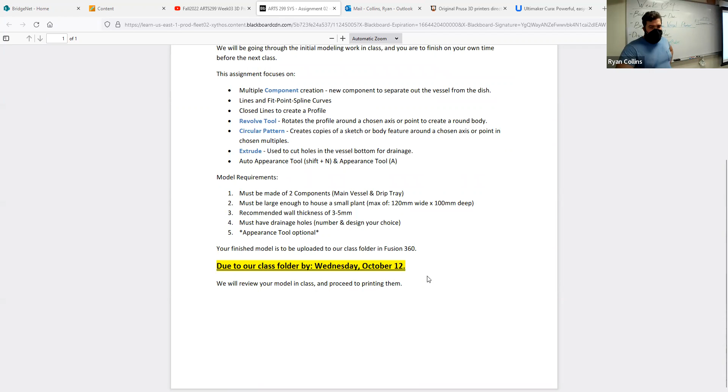All right. So with this project, and this will be due sooner than later, it's like 2 weeks, October 12th. In this project, you're to design a round vessel that's large enough for a small potted plant. And I know that's a relative term, but I do have dimensions down here.

Using the Revolve tool, and we're going to discuss what that is. Also, it must include some sort of a drainage dish. So it'll be two separate components consisting of their own bodies and sketches. I'm going to talk about what that really means. Obviously, we'll be going through this in class, and you'll finish outside.

So first is multiple component creation. So far, we've been working on the default single component that Fusion gives us. I'm going to show you how to create multiple components, multiple separate components. This will also consist of your basic line work and sketches, and we'll use closed lines to create a profile, just like you did to extrude.

Only, like I said, in this case, we're going to use the Revolve tool. This creates and rotates that profile around a chosen axis. Sometimes it's referred to as a lathe tool, kind of like if you have ever actually used a lathe, doesn't matter metal or wood. It's a round cutting thing. This is creating something round, basically.

We'll also be using the pattern tools, and in this case, a circular pattern tool, both to create holes and other features. This creates copies of a single sketch element or body feature, object, doesn't matter. The pattern tool is really helpful within Fusion, around a chosen axis or point of your choosing. Basically, this can take what you've just done with the Revolve tool and add features to that same Revolve tool on its surface. Pretty handy.

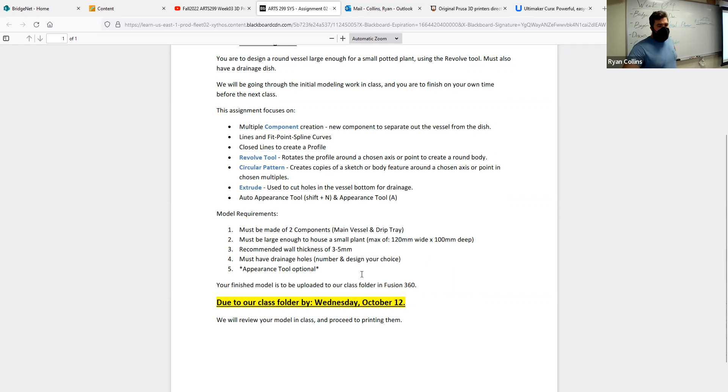Deep meaning the actual depth of the project, across, that sort. Recommended wall thickness is about 3 to 5 millimeters, that's a good thickness for this material we're using. It must have drainage holes, otherwise you've just made a teacup. The number and design is totally up to you, and the appearance tool is optional. I'll again show you how to do that. All right, so let's go over just what any of that stuff means.

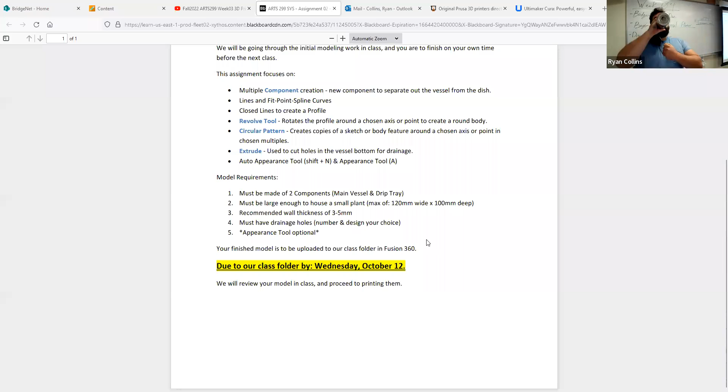All right, so first things first, save your project. Always start with saving your project. I know you kind of jump right in—I do too, I'm sometimes bad about it—but it's always best to start by saving.

Control save or Command save, or just go up to the save icon, and we'll go with the example name Revolve... oh, be better if I can spell.

Revolve Vessel. All righty. So in this case, you can go off of an object if you want, an image. We talked about how to use the insert canvas tool, but not going to use that on this one. Or you can just freeform this—totally up to you, doesn't matter.

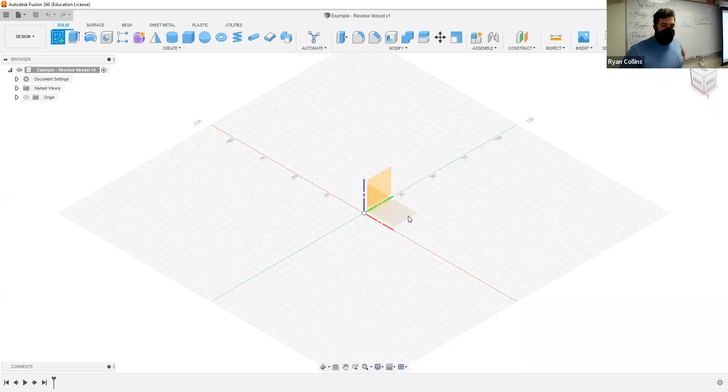In this case, though, we're going to start with a sketch, but instead of working on the XZ plane, we're going to work on the XY plane. Right there. And just to refer to what we're doing here, I'm creating something directly in front of myself, working directly off of the sketch plane.

Now, a few things I like to work with: you need to have it at a general dimension. It doesn't have to be that big, it can be smaller, you can make it slightly larger, somewhere around that. But we're working with something about 120 millimeters wide or tall by about 100 deep. Those are relative—you can tweak those dimensions if you like, that's fine. But what I like to do is start with a bounding box.

And all that is literally just making a box that helps me define that. I'm also going to use this as a construction line. So I'm going to start with selecting that construction line box on the toolbox, or you can just press X.

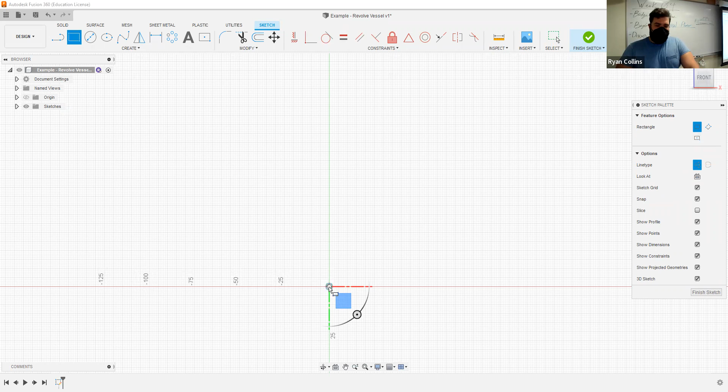So starting at the origin point, I'm going to go up, and I can tab over. All right, I want that one to be 100 millimeters tall. And then for width, since it's 120 wide and I'm only starting on half, let's go with 60. Okay, now I've got a construction line box that gives me a general reference point.

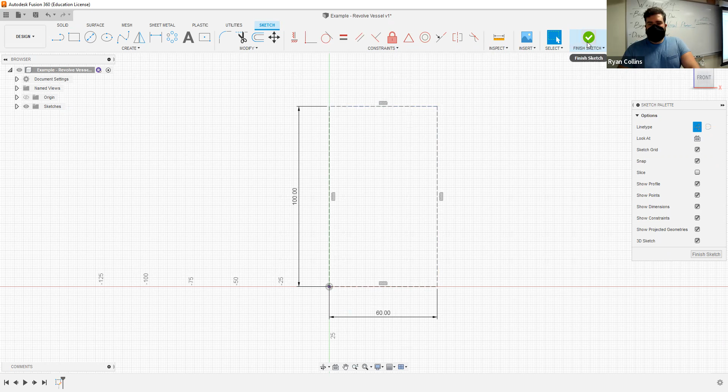Good. Finish sketch, and I can just leave that there. All right, finish sketches—and I'm going to label this as reference.

Okay, now I've started this sketch, but one of the main elements of this project is it must be in two components. The component here, your main set, is the highest set of elements on your hierarchy tree. Now it doesn't mean it's the absolute top, but it means that a component can consist of everything on here. Basically, a component can consist of—and this little icon right here, the little cube, is the component icon—origins, sketches, bodies, any variation of other bodies and elements and tools, joints, all kinds of stuff.

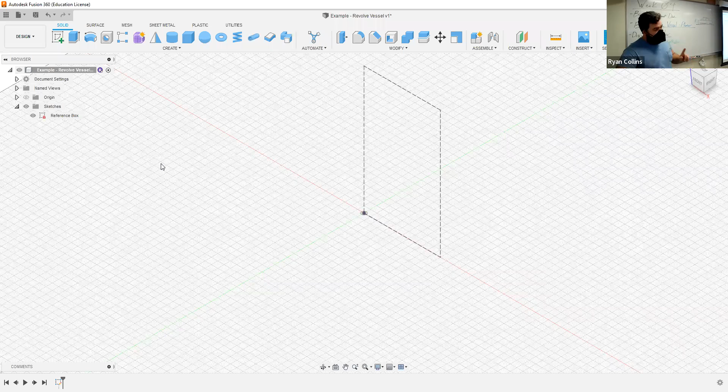But this needs to consist of more than one component, so that means each component is going to have its own sketches and its own bodies. Technically, a component can consist of multiple components—you can nest them within each other. In this case, we want to avoid that; we want to make two surface-level components.

So to start components, go up to the top bar, go all the way over to Assemble, and it's your default icon up here—the little stack of cubes. You can also use the drop-down; you'll see a bunch of options. Top one is New Component—that's what I want. Mouse over that and you can see it creates a new internal or external component.

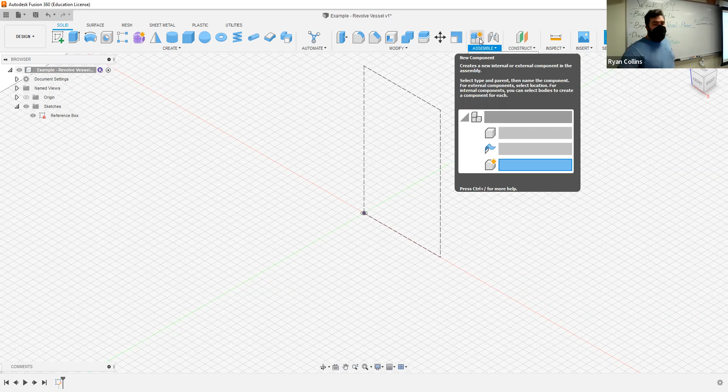That means it's either within its own component, or it's its own component or within another—you can nest them. You can also...

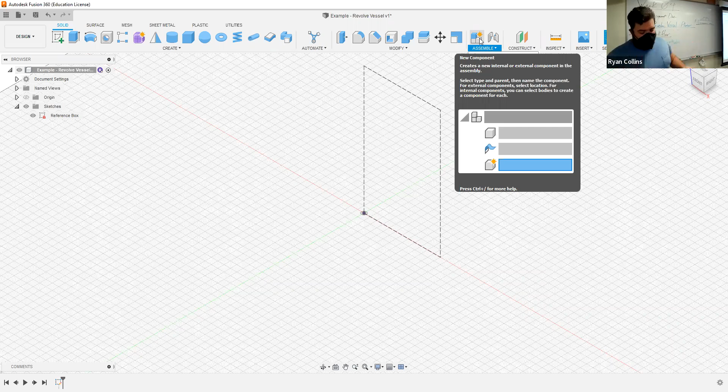extract components or bodies, objects from a current project or component, and create an entire new component utilizing that. I know that's a very vague concept, but I just wanted you to know that if you forget to start by creating a second component or multiple components, you can still course-correct that.

But I'm going to start with making components. So select that button, you'll have your toolbox pop up, and you can pre-label these. All right, so I'll start with vessel—and right now there's no parent bodies or anything like that, so it's just standard, same with type standard. We're not working with sheet metal, we're just working with a standard component.

Select OK. Now you see that a new component box, this little cube, has appeared down here. Also at the top of our hierarchy tree, that single cube icon has turned into a little stack of little cubes—that's showing there are multiple components within this one component project. All right, the other thing that's happened is, it's hard to see, but my sketch line has kind of ghosted out.

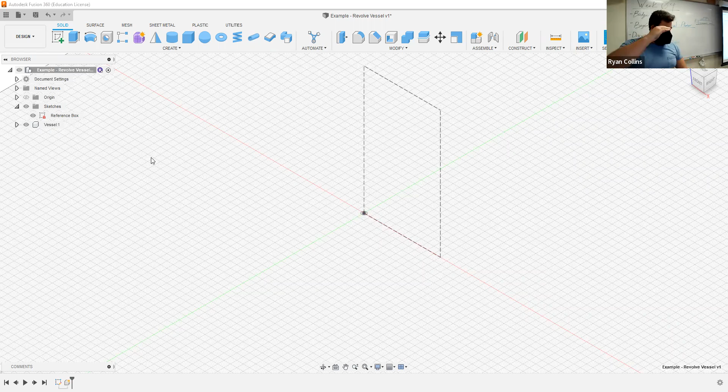That's because I have this component currently active. If I go back to the very top, at the opposite side from the little eyeball icon, you'll see a little circle appear on the right side. Select that. That activates the entire project.

So what I want to do is go back up to the top, select that. I'm going to start another one, a new component. For this one, we're going to label it not stray, tray. Select OK. Now it has created another single component.

You can see these two components are their own single component. There's no stack on them. The stack is on the top here. So, all right, now I have my two components made.

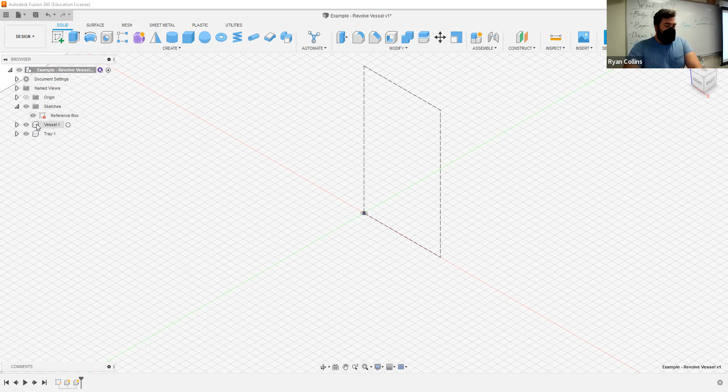I can go back to the very top and reactivate everything, but in order to keep things isolated and a little more organized, you want to actually activate the component you're currently working on. This is a little trick to the workflow we've been using: start by creating your components, just like starting by saving your project. It just helps save you a little bit of headache down the line. That's all.

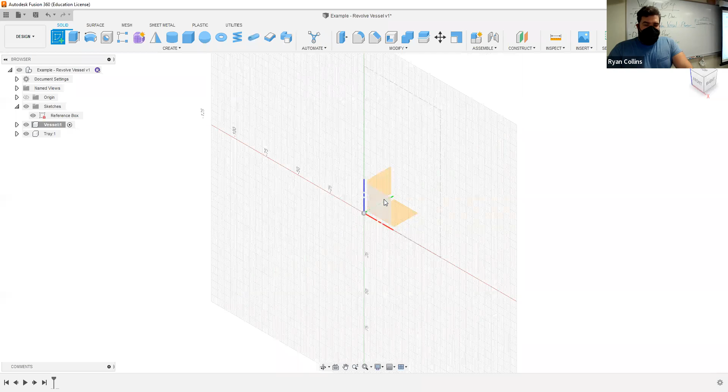So, all right, I've got my vessel active. Now I can start a new sketch on this. Select the same XZ axis, working there, but I have my bounding box on another component, and it's still visible because it's still active and visible. Select the hide icon and it goes away. I'm going to leave that there because I want that as a reference.

Now for this, like I said, you can start with a reference image if you like, or you can just kind of freeform it. Doesn't really matter, because this is a very organic assignment in that there's no real direct requirements. We will discuss this as it pertains to 3D printing and what will be easier to work with or present problems, but we'll come to that.

Main thing is you're making a vessel. You're making a taller-than-it-is-wide vessel, although not necessarily, because some planting pots are wider than they are tall, so go along with that. But I do have my reference box here that tells me how wide and how tall I can make it. You can make it smaller, that's fine, but that's about how big we want to max out at.

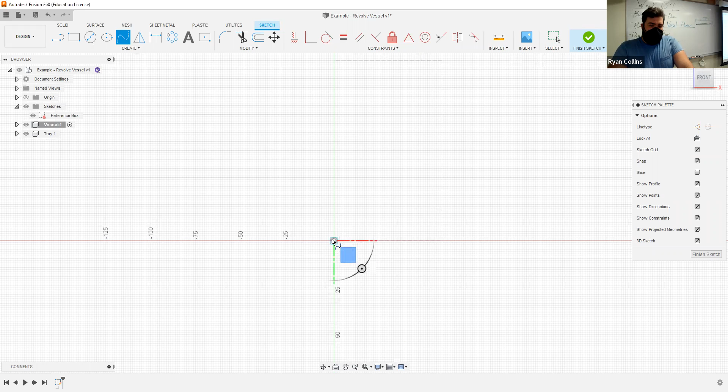From there, honestly, I'm just going to use the fit point spline. So I'm going to start at the flat origin plane, select right in the center, and I'll start working upward. You can make this kind of like a wine glass, or you can make it kind of kick back.

Just remember that if this is for planting a plant in, you do not want to have it shrink at the top, because ultimately as the roots would grow, it would turn into a root ball in there and you'd have to smash the pot to get it out. So I wouldn't go with much of a curve inward. If anything, I would have it flare outward.

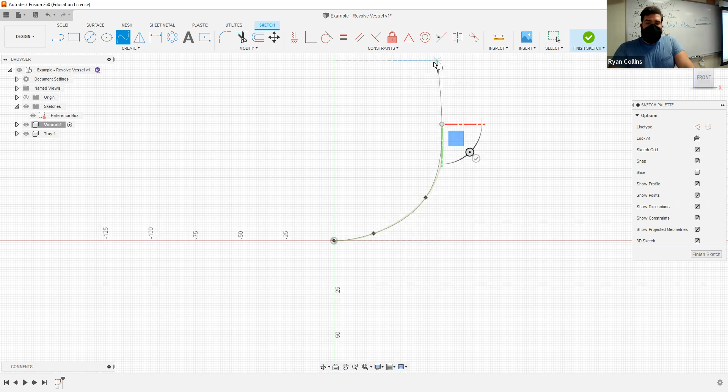With that, I can just start creating a line. There we are. Remember, you can change this around. You can change around any points on a fit point spline. They are interlinked. You can also change around with the handlebars.

You can just really warp the hell out of this thing if you want, or just Control Z back. But if you had a point that made contact or snapped to that box, it is now going to be linked to that box. I can move it up and down, but it doesn't want to let me move it left or right. Same thing up here: this one I can move left and right, but I cannot move it up and down.

What happens if I get to the side? Doesn't matter, I can move it outside of that box. That's fine, but it will not let me move off of there. In order to change that, you have to right click on that point, go down and select delete coincident. It's a constraint that is built in.

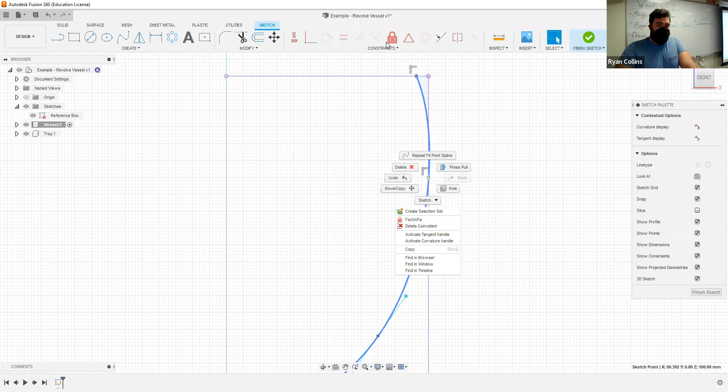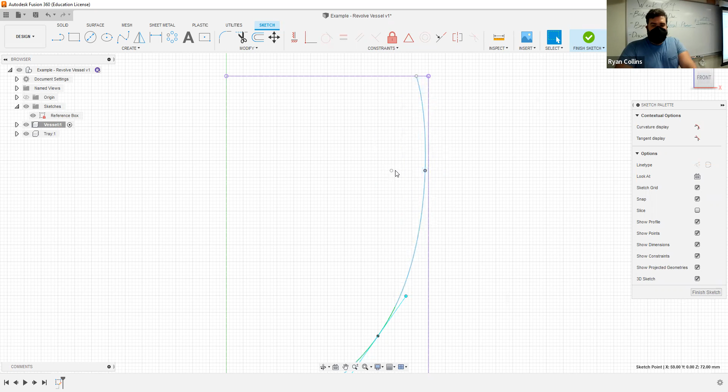Delete that. Now... I didn't do it. Delete coincident, dang it. There we go. Now I can floop it around—technical term, floop. I don't know why I created that point up there. Let's delete that.

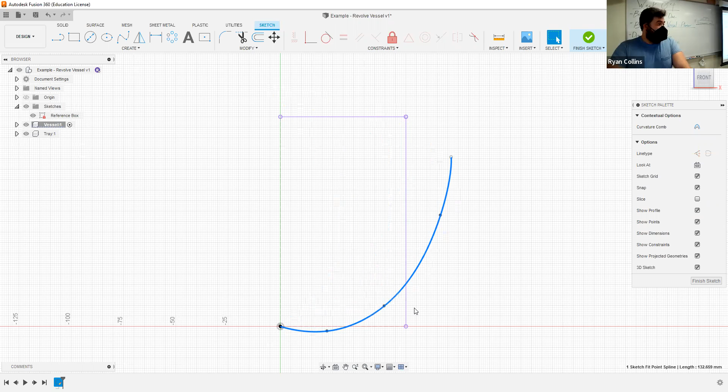So I can still play around with this. I can drag this around. Now that it's unlocked, I can rotate the whole thing based off that single point. There's some really cool built-in features that unfortunately Fusion doesn't necessarily tell you that they do, but this is definitely a mess-around-and-find-out situation. It's the scientific method.

So let's drag some points around. There we go, super duper.

Now, to create a closed profile, remember you need two sides, top and bottom. It needs to be completely enclosed. You can't just use a single line. You can do two things: you can create another fit point spline and try to match that up, or if you don't want it to match entirely, that's fine too. Or the more efficient way, use the offset tool.

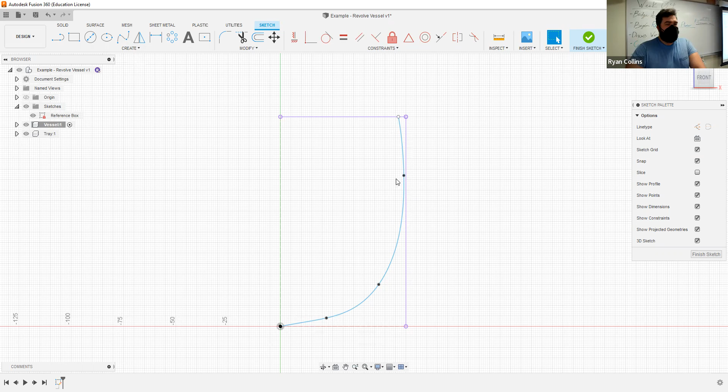Very handy tool. Select a sketch, and this will define a new line. It's not an exact mirror, it's an offset of that line, depending on how far away you make this. In the project, it says let's make sure that's 3 to 5 millimeters thick. So sure, let's make it 3.

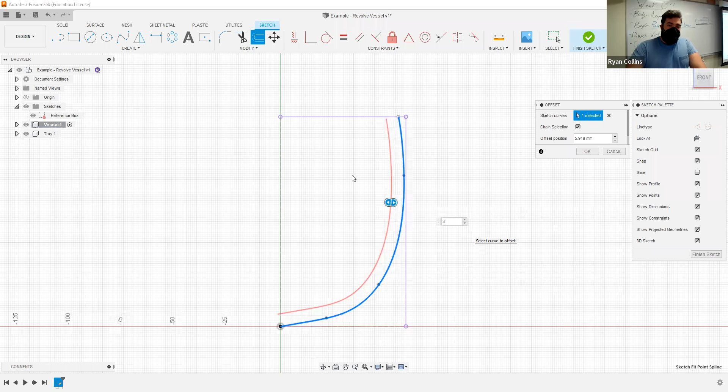It moves over 3 millimeters. Now you see down here, it has gone beyond that line, and at the top it's below. That's because it's operating off of the average direction of a line. If this were an enclosed shape already, an enclosed profile, it wouldn't be a problem, but it would shrink it uniformly out from within that, or outside. You can go outside too, doesn't matter.

That's how it works, it's really handy. But we'll select OK there. Now, to create a closed sketch, I need to close this sketch. So I got two options here. What I can do is just draw a line straight up. That'd be fine, so let's do exactly that.

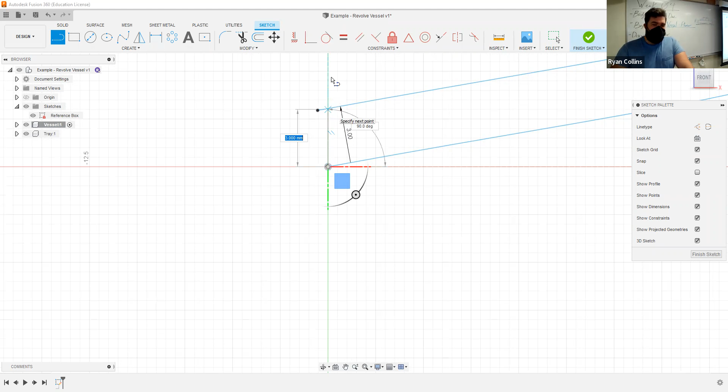Line up. I can have the intersect snap to that bar. Or I could just continue and then just trim off the excess, doesn't matter. Hit escape, but I do have that line there now. Very handy. I don't need that extra dangly bit, so let's go to trim. It assumes that any intersect means that that's a cutting line, so trim off that excess. It's going to give you a little warning because the constraints have changed.

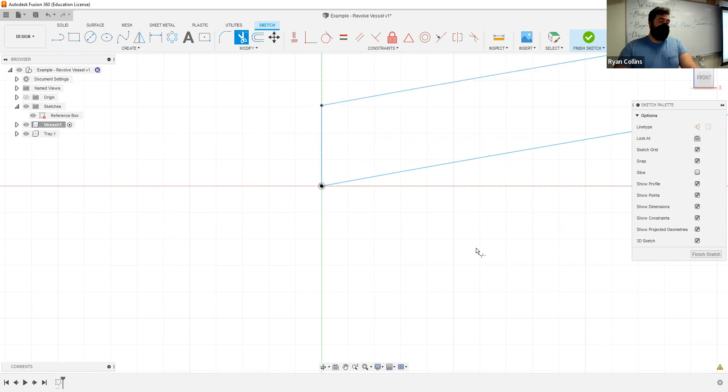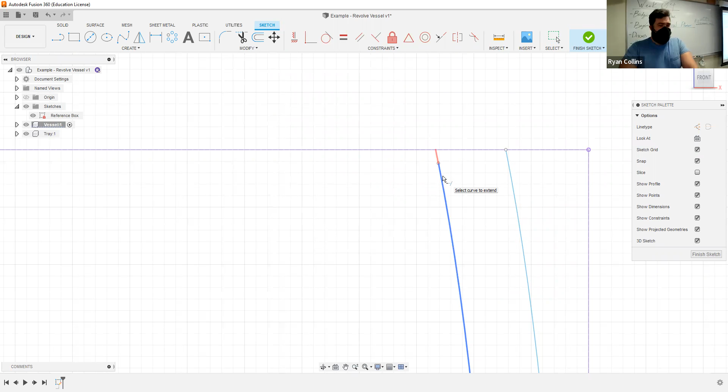It's just telling you you've altered the offset line, which I have. Excellent, all right, now we got the top. So I got a couple options here too. If I want to use this top line as a max line, I can go to modify and extend, and that will extend that line at its current curvature or best summation to the next available cross line. Select that.

That's fine. Now you see that since it has now enclosed, or at least it's using the previous sketch as an assumed other element, now within the bounds of that profile, it has gone blue. That's showing you that it is now a closed profile and can be extruded, or in this case, used as a revolve or anything else.

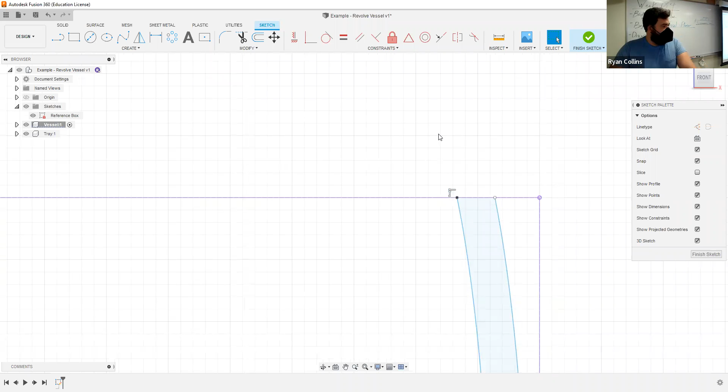But sharp cornered things are rarely useful, so you got a couple options there too. I can go ahead and extend this. If I use a fillet tool up here, I can't, because there's not an actual line there to work from. So escape from that, let's use a straight line here, point to point.

Now I have something enclosed, and it has gone black just to show you that that is now a locked-in line. Lines, sketch elements within Fusion go from blue when it's still technically a transformable line, meaning you can drag it and move around with it, or it goes to black when it is defining, or denoting, that it is now a defined locked feature. You can still technically move it to some degree, or make numeric alterations, but it is now locked in virtual space.

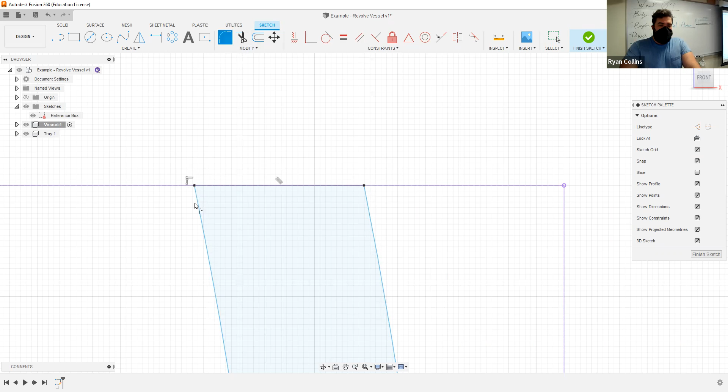This parallel line floating above it is a constraint showing that it is parallel, parallel to the construction plane or this construction box that I've made here. That's all, just showing that. All right, now I could use the fillet tool and round those out. Convenient.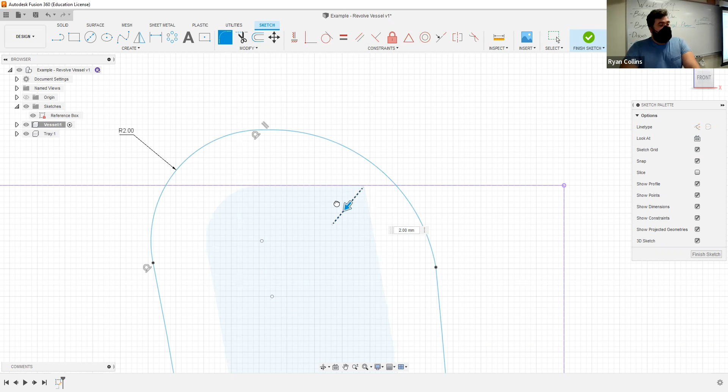Since I did not hit escape and I used both in the same fillet tool, or selected both in the same fillet tool, now I can use a slider and they drag in and out. Now be careful, because you're going to get some weird stuff happen because this is an offset. Offsets leave an artifact of the information that it is an offset, not just a second line, meaning that it's going to try to distort to compensate for any changes to those interlinked constraints in this sketch.

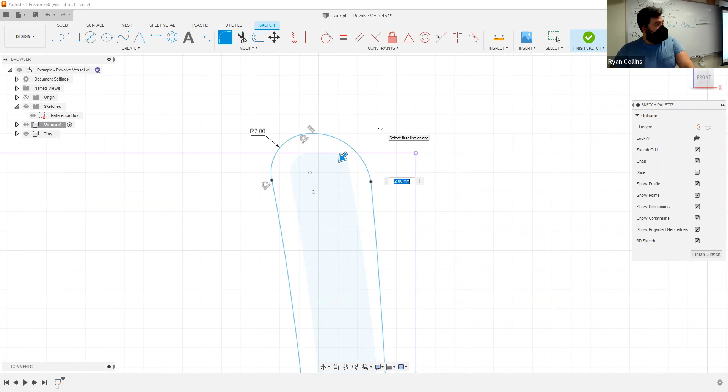So if you want a rounded top, but you're not really sure where you want to go with it yet, then hit escape, Control Z, get away from that. And instead, I'm going to use a circle tool.